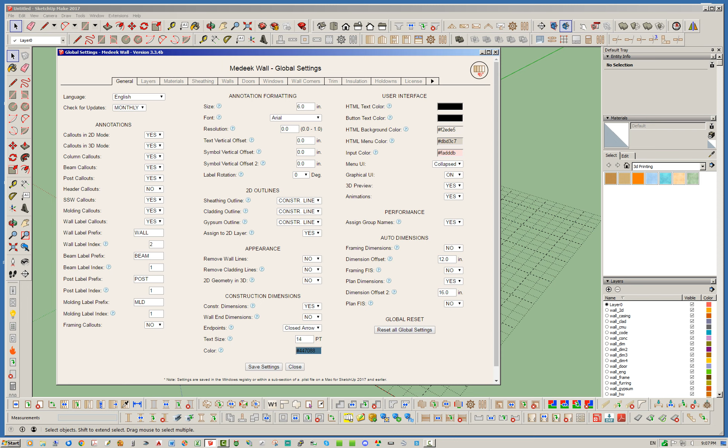So to get started, let's jump here into the global settings, and right here under the user interface section in the general tab, you will see now there's a new parameter called menu UI. If you look here, you'll see three options: legacy, collapsed, and expanded. Let's start with legacy.

That is the original menu system for the wall plugin. Just to note, this menu UI parameter will only affect the wall draw menu and the wall edit menu currently. The other menus are by default legacy, and there are no other options.

So let's go ahead and just change that to legacy. I had it changed the other way for testing purposes. Now we're just going to go ahead. The draw menu and the edit menu are pretty much the same thing, but I'm just going to demonstrate this using the edit menu just because I have this wall already drawn here.

So when you go ahead and edit the wall assembly, as normal, you're going to see this big, long menu pop up with all these parameters and sections. So yeah, this is the legacy menu, the original menu.

I've left it as an option only because there are people probably that are very familiar with it, and it's hard to take something away from people that they're used to. So if you want to stay with the legacy menu, by all means stay with it.

My main reason, well, I guess the feedback I was getting was suggesting that this menu was much too long and too complicated, and for the new user, when you load up a menu like this, it's rather daunting. I mean, until you get the idea of how things work and understand that most of these options and parameters you don't need to mess with or change, especially the wall corner and the wall end sections.

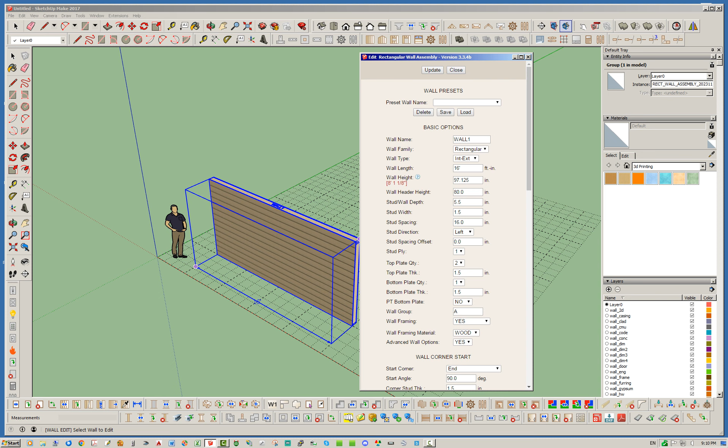So anyways, this is the legacy menu. Like I said, it's still available, you can still use it. So let's go ahead now and demonstrate the other menu.

So I'm going to start first with the collapsed menu. Let's go ahead and change that. Now let's edit this wall here. And you're going to notice right away that there's quite a few less parameters shown right off the bat.

I've still left a few basic options here that I think you kind of need to see regardless. So I've left a few here that I think are important. And then I've taken a lot of the basic options that were previously here, and I've basically placed them in a section called framing options.

So if you mouse over this little minimize or maximize button here, I call this the toggle button, you can basically toggle these sections on and off independently. So yeah, basically a lot of these parameters were previously in the basic options, and now they're under the framing options.

Now I've also taken this remove studs option that was previously in the advanced options and moved it to the framing options, because I thought it was actually a better place there. So yeah, just kind of shuffled a few things around, but notice how the wall corner, wall end, advanced options, everything is minimized right off the bat. When you first open the menu, it's going to look like this.

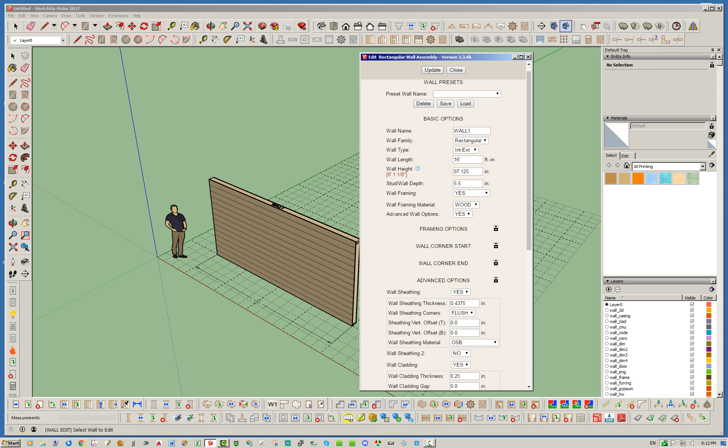Okay, so if we look at this wall, we'll notice we have blocking. If you look real close, you can see that blocking. So I'm going to close this out, and edit this wall one more time to show you how that menu has changed.

So now you'll notice that before, the blocking options section did not show - now that menu header will show, and you'll know right off the bat that you have blocking enabled, even though the advanced options are not showing. And if you toggle that on real quick, you can see that you've got blocking turned on. The nice thing is you can have this minimized, and just by showing that header, you'll know you have blocking options turned on.

So the collapsed version tries to keep things minimized by default, and then if you need to get in here and open things up, you can. That's kind of the thinking there.

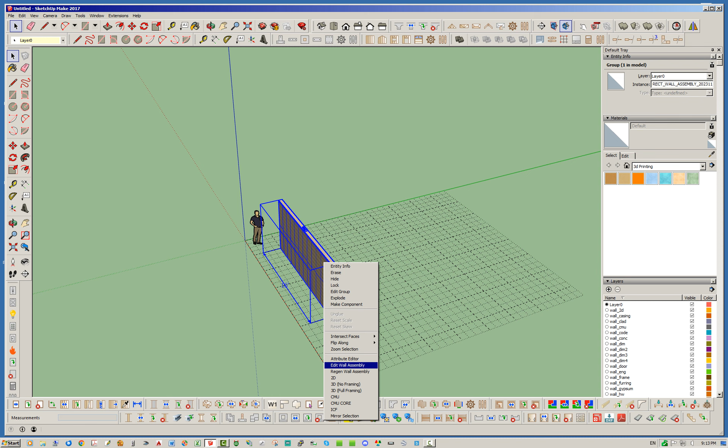Now let's go ahead and change this to the final one, which is the expanded menu. Basically the expanded option is the same as the collapsed option - pretty much the same thing, except now you'll notice that most of these have been automatically expanded for you by default. So it has the same toggling ability as the collapsed option, but everything is expanded.

For instance, if we turn on wainscoting, it will open up that section and expand it as well. Let's close that out and show you again - let's open that now with the expanded menu, and you'll see that everything is expanded.

Exterior wainscoting is expanded. Of course, you can always manually toggle them shut if you don't want to look at them. But one thing I want to point out here is that these two sections, the wall corner start and the wall corner end, are not expanded in the expanded option.

The reason for that is because these two are generally not used too often, in my opinion. So I think it makes sense to keep them closed and only open them manually if you need to. So really, the expanded option is no different than the collapsed option, other than the fact that by default the different sections are auto-expanded for you when you first open the menu.

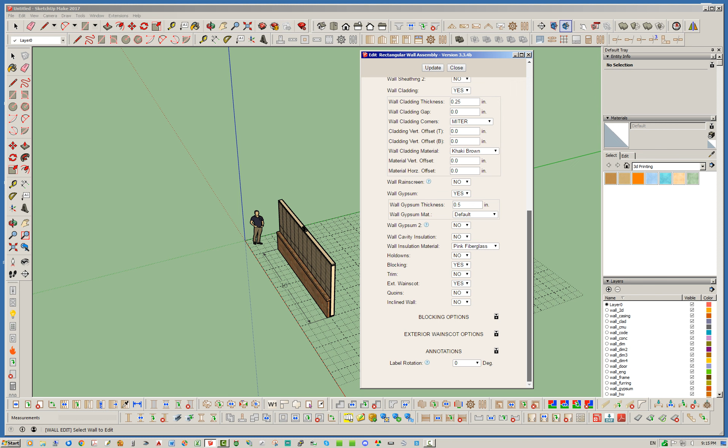All right, I think that pretty much sorts out this new menu system. Like I said, this only applies to the wall draw and wall edit menus. All the other menus, if you select expand or collapse, it's still going to just show the legacy menu, so there's no option yet for that.

I may add additional parameters or options here, depending on how things go and what feedback I receive. So right now I'm trying out these three options, and we'll take it from here.